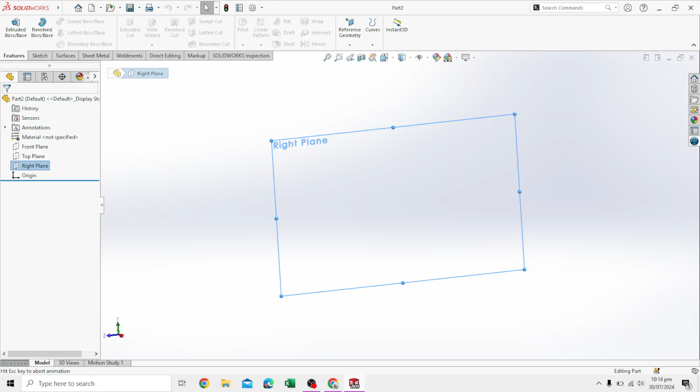Okay, next in this part, just go to the next right plane, sketch, take center lines, and we will draw out a center line from way below here and move it up through the center. Make sure it's completely straight. Then we move on to the side and also pass that through the center.

Make sure it's straight. There's a number that appears next to it that shows that it's straight, and we will make a center midpoint line, basically not a center midpoint line, and we just skip that drop down menu midpoint line, and we will draw from this center. Make sure it's vertical, and we will dimension it later.

First, we will draw another set of lines that will be completely horizontal, just like this. Same thing with the other one.

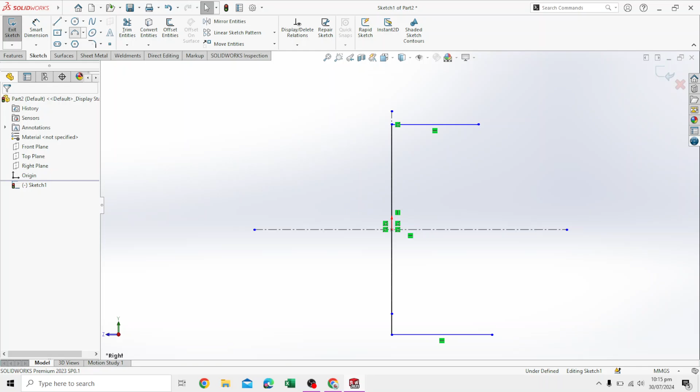Okay, and we will use the 3-point arc and connect the heads of these two, basically like that. We will specify the curvature after this.

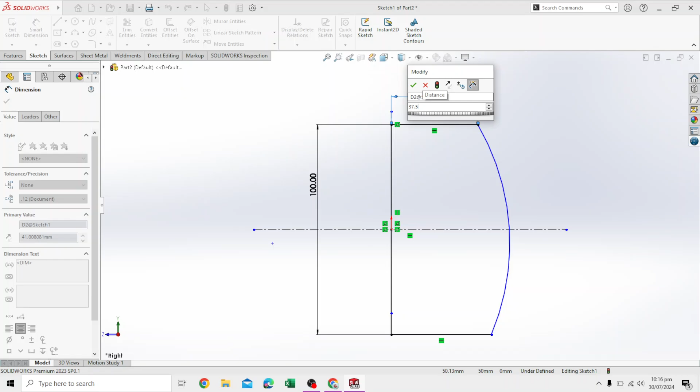So first off, we specify this, which is going to be 100. Now that is 100, we will specify this, which will be 37.5. Press enter, and the same goes for this, which will also be 37.5. Press enter, and then the curvature of this will be 125.

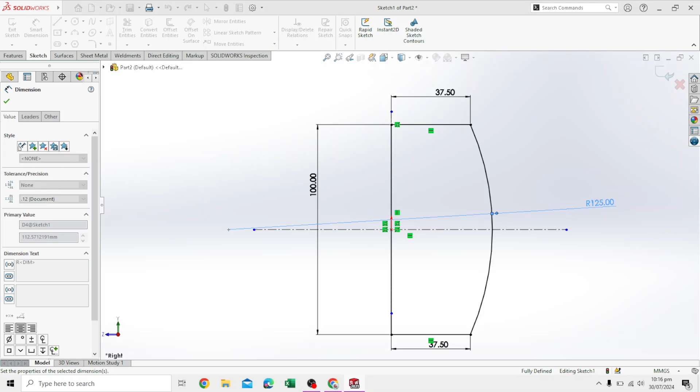Right, this is what we need. Okay, I'm going to modify this to 90.

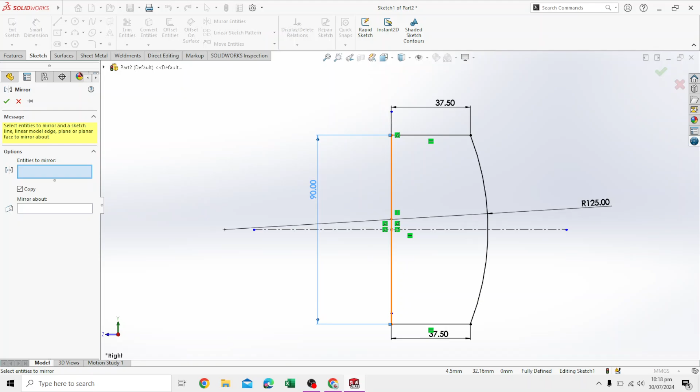Then we will go to mirror entities, and we will simply mirror this, and this, and go to mirror about, and this, basically select this. It's gonna start appearing in yellow as a preview. Say yes, this is what we need.

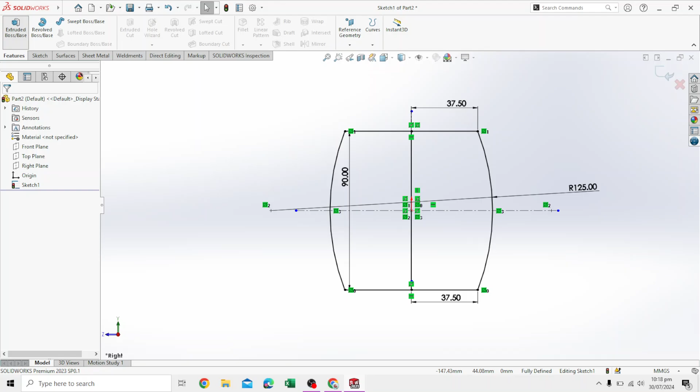After that, we go to features and extrude this by 100 millimeters. It's a blind extrude, so it's going to be in that direction. Doesn't matter which direction it's in.

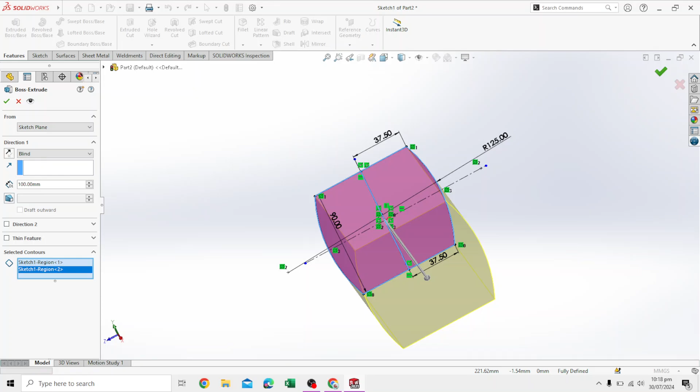It's going to extrude. Sorry, yeah, the reason that didn't extrude is because I didn't select this region, so it's like this, like this. This is what it's going to look like. We say yes. This is what we need.

Now we click on this face. We say sketch, and we say convert entities. The boundary of this shape has now been drawn. That's why you see it as a much darker color as before.

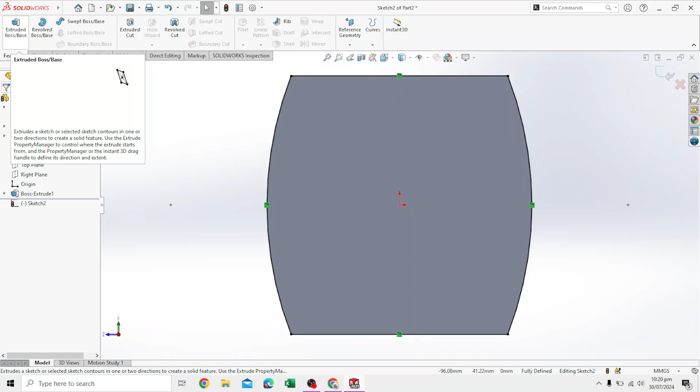Go to features, and we will extrude this once more. Not 100, will be 35, and we will give it a draft of 45 degrees. Press enter. This is what it should look like. Say enter.

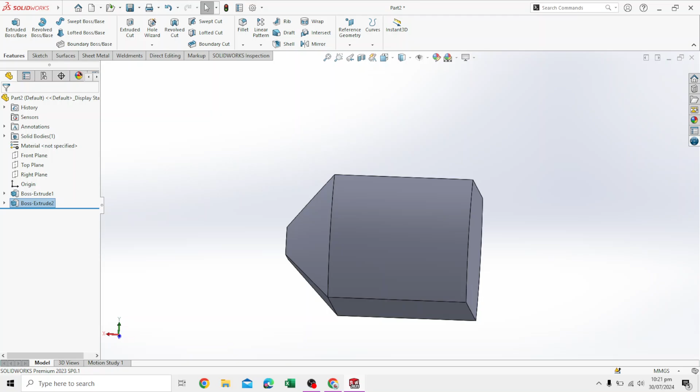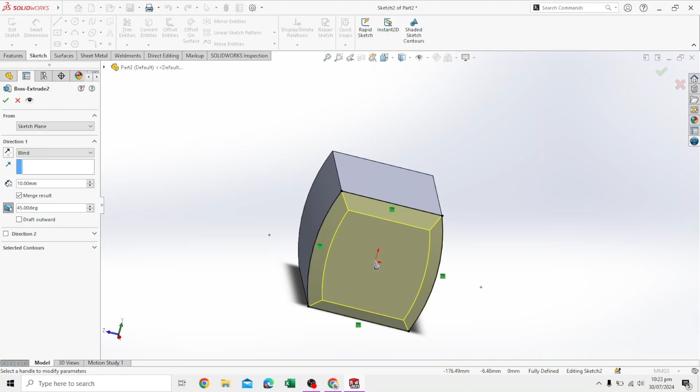On second hand, we will change this value to 10 rather than this, basically the height of the extrude, to decrease it to 10. Need more surface to work here afterwards, so decrease the extrude height to 10, and 45 degrees is correct, so we'll say that this is what it should look like.

And then afterwards we will sketch on this surface. From this we will basically draw a circle at the center. Smart dimension, give it a dimension of 68. Yes, it's almost reaching the periphery.

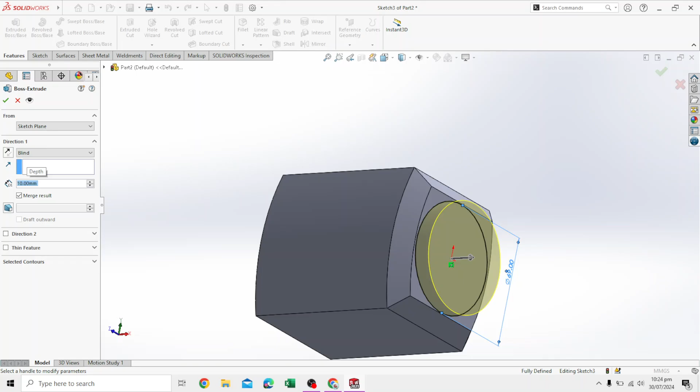And from that, we will extrude this feature by 10 millimeters. Say enter, and yes.

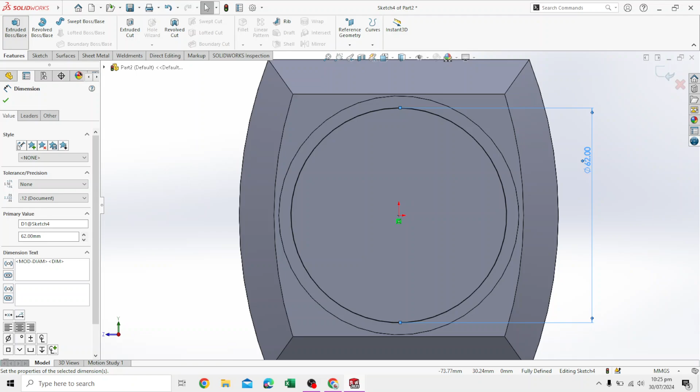Further on, we will click here, select this, another circle, which should be this, and then we will say extrude this newer circle by 30 millimeters. Say okay. This is what it should look like.

And then we will sketch on the tip of this surface that we just extruded. On this surface, we will draw a circle that is completely in line with the horizontal. We will specify the center.

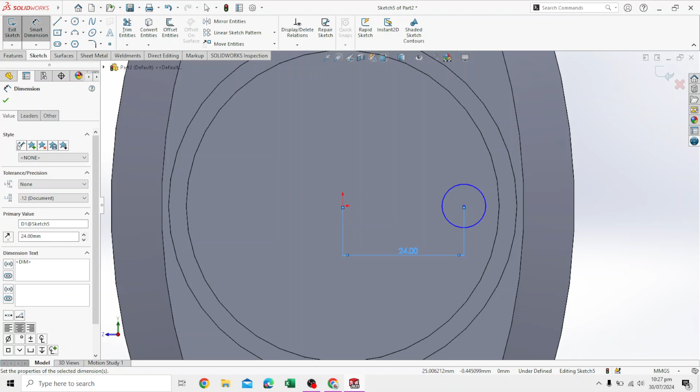Once we do that, we will make the distance from this to this about 24, I think. And the circle itself is 7.24.

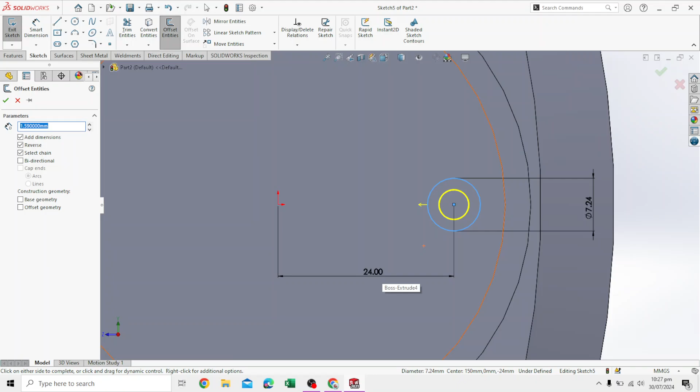And give it an offset. Give this circle an offset. Reverse the direction from this number. We will reverse the direction, and obviously 10 is too big for this, so it's not showing a preview. 1 and 1.59 is the size of the preview. There you go. Now it's appearing inside, and the distance and everything else is set. So let's say okay, this is what we need.

Change this value to 7. Actually 27 will be better. Yep. Say okay. So we change, this is 27.

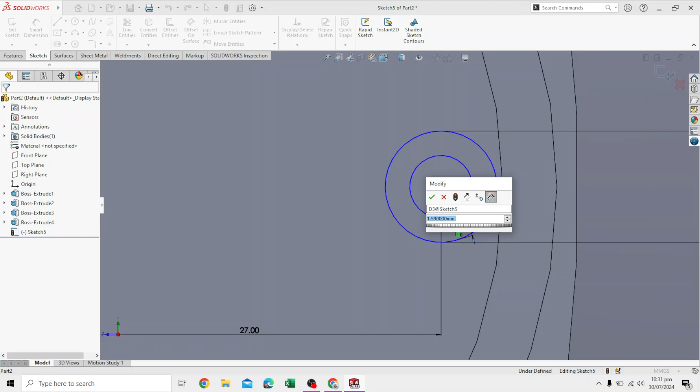This, I think we should change this as well and make it only 1 millimeter. Yep. If we zoom out, this is how it's gonna look like. Yeah, I think that's better.

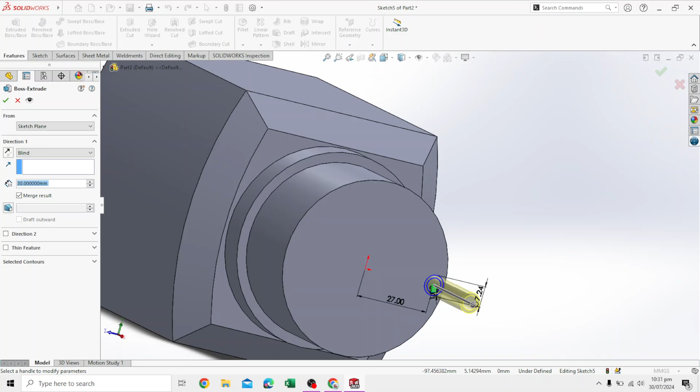In that context, now we will extrude it, and extrude it by 1 millimeter only.

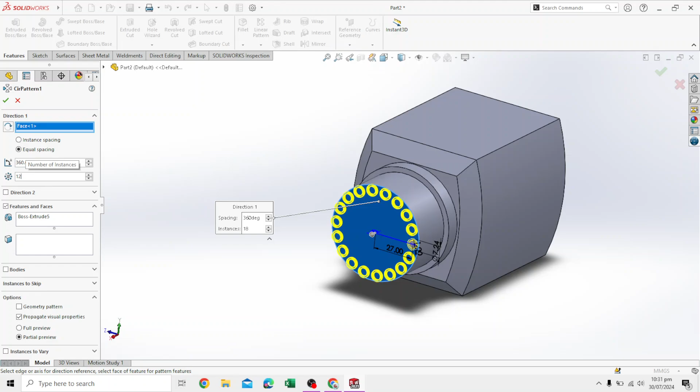In this direction, it's being extruded in the right direction, and we will then go to linear pattern, drop down menu, circular pattern. In the circular pattern, it will want a direction. You see this box that's highlighted, so you select this and change this number to 12. Say enter. Yes, this is what we want.

Okay, this is what it should look like. I think some of them are clipping a bit outside.

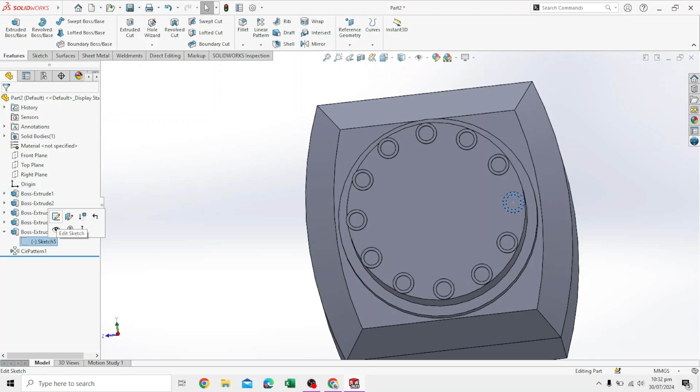If we were to go back and sort of decrease the size of this sketch, so instead of 27, it's just like 26.5.

That will pull it in a bit, and a few of those nuts were clipping outside. Now that won't happen. It's going to rebuild all those structures again, but now with the new information.

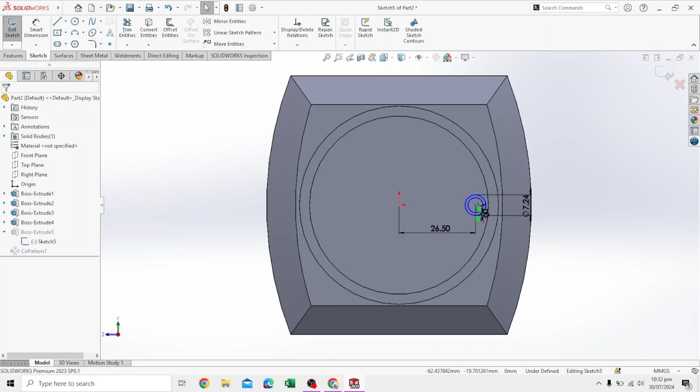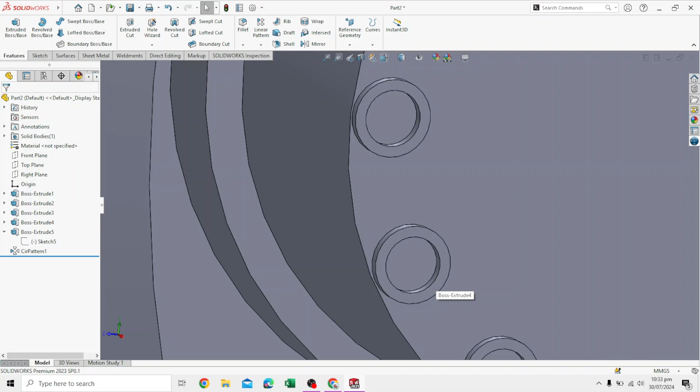Let me just exit sketch so it finalizes the structure. There you go. They're at the corner, but not clipping out as they were before. So this is much better. You can move it inside or outside, but I think this is better.

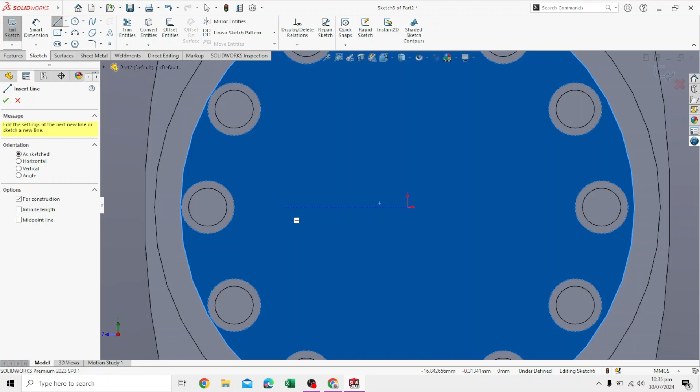On this face, go to sketch, and we will draw a center line. Don't like how it turns this blue until you click or do something. Sharp blue.

From here, we will draw a normal line at a certain distance. Let me just draw this instead of a normal line, we'll do a midpoint line. Click it here on this. Not sure why it's glitching out. It should be completely vertical, 90 degrees.

Let me specify the dimension of this, the 34 millimeter. Yep, that's about right.

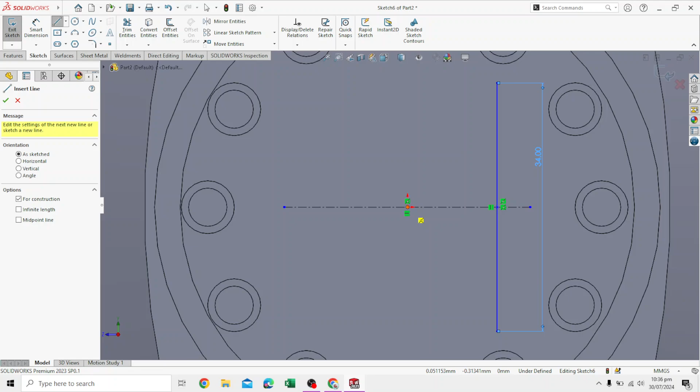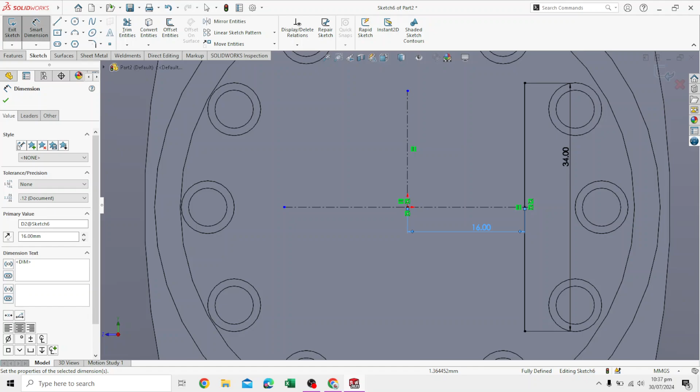Make another center line from the center and simply mirror this first line. No, before mirroring, let me cross out of that and go to another dimension, and we need to also dimension this, and this distance needs to be 16. Enter. That's how far it needs to be, and then now we will mirror the entities, which is basically just this line.

And we will mirror it about this. Now we will move on. Yes, this is what we need.

Go to 3-point arc, click this, click this, and create a curve like this. We will obviously dimension this. In the smart dimension, go to this and give it a dimension or radius of 22.

I think it's curving way too much. It's starting to collide with this.

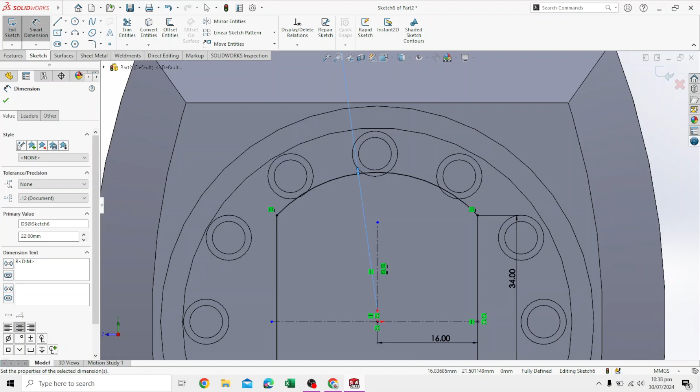I think in this case, I'm going to decrease the size of the nuts that we made. This was the circular pattern that we did for this extrude. There we go, this is the sketch for it.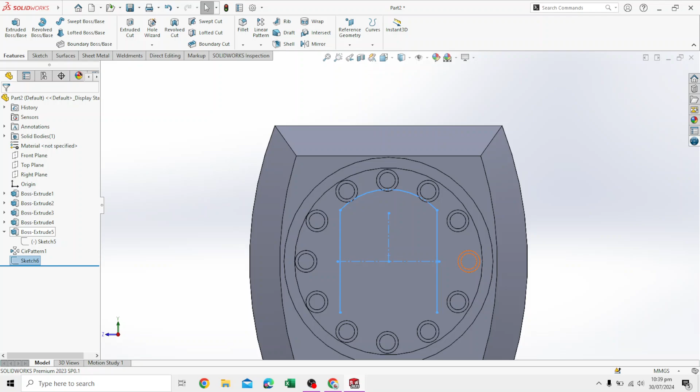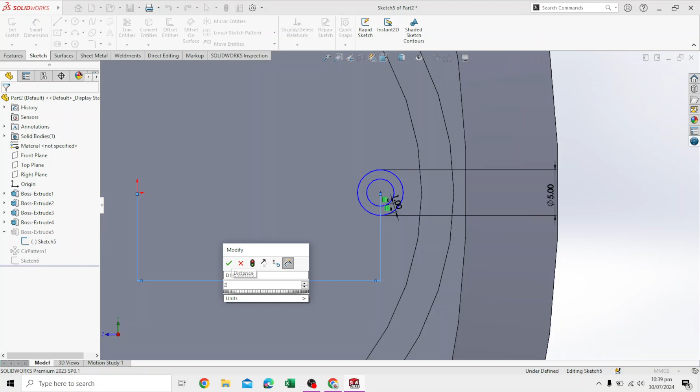I'm going to decrease the size because this is too big. It's colliding with the, I am going to make it 5. Press enter and move it outward to its original location, which was 27, so that it moves back and doesn't collide with the distance. So take note of that.

Once that's done, it will obviously apply the feature to all these. Let's move on to the sketch. Now it's not colliding anymore.

So again, if you make a mistake previously, you could just go to the tree and correct it. I did it by this, it highlights the part that I made, edit sketch, and then I went in and changed the values. Said okay, and it applied that to all these because these are made using this as the reference.

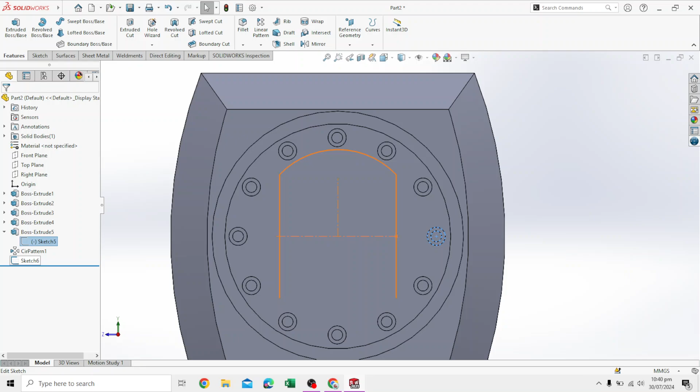We go back to this, edit sketch. In this, we go mirror entities, click this, and we say mirror about. Highlight this box, mirror about, and then for this.

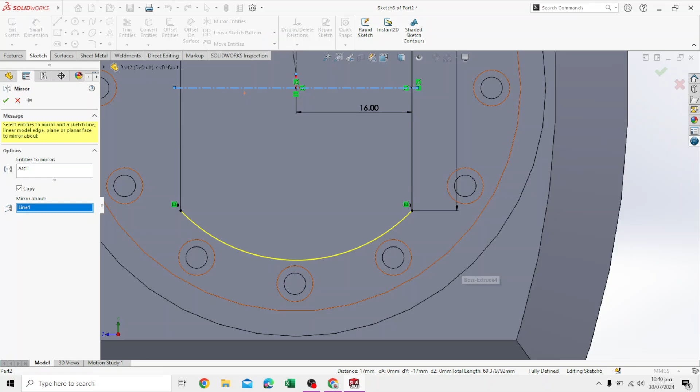And we observe that it's connected, so there's no discrepancy, there's no disconnection. It's a complete loop, it's a full surface.

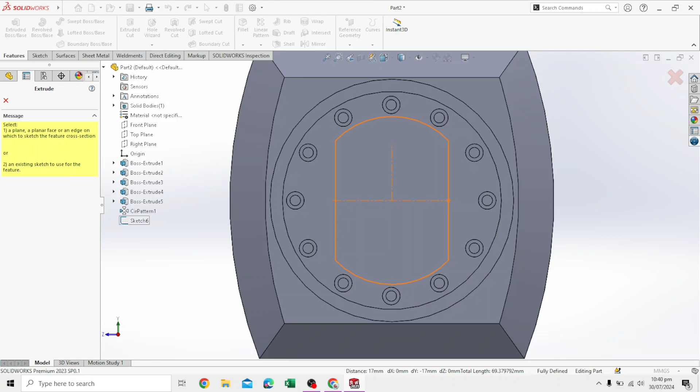Now we need to extrude it. We move out of the sketch, go to features, extrude this new geometry that we just made. Open up this loop, the sketch. This is the part we need to extrude.

It's asking obviously how much I want to extrude it. We will extrude it by 100 millimeters and say yes.

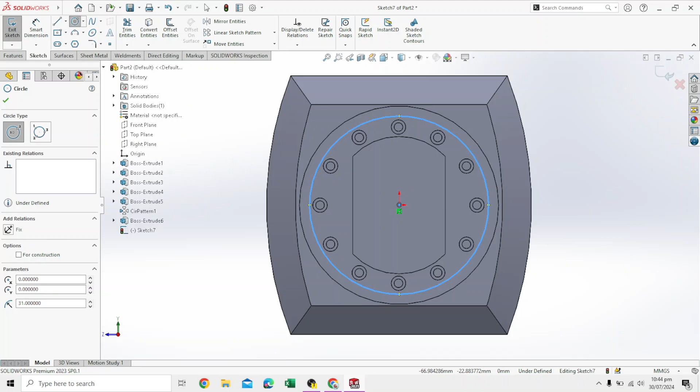In this, now we will sketch on this surface, just progressively building on top of each other. Draw a circle from the center. It should be equal to the smaller circle. Let me just check the schematics. Yes, it should be equal to this one, and then we say yes, this is what we need.

Go to features, extrude this circle now, and extrude it by 10 millimeters. After that, we will...

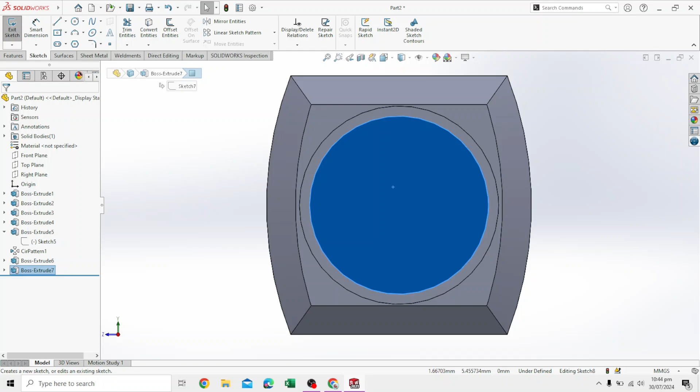Draw on the surface of this new circle, sketch, click on this corner and say convert entities. This will draw a circle, and then using that we will say offset. We will reverse the offset and give the value of 1 millimeter.

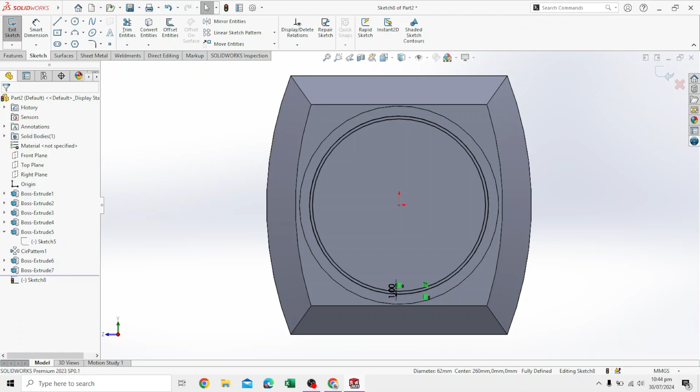Say okay, this is what we need, and now that this smaller circle that we just offset, using that we will, let me just delete the original circle and say delete. Now it's no longer there, just the offset circle is there.

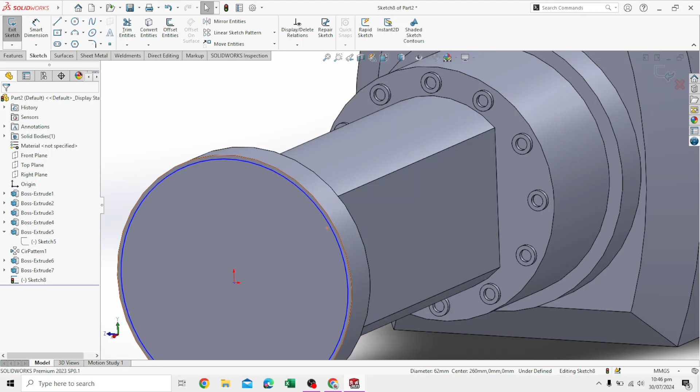We will go to features and extrude it by only 1 millimeter. This smaller circle, you can see that it's being extruded at a lesser circumference or diameter as compared to the other.

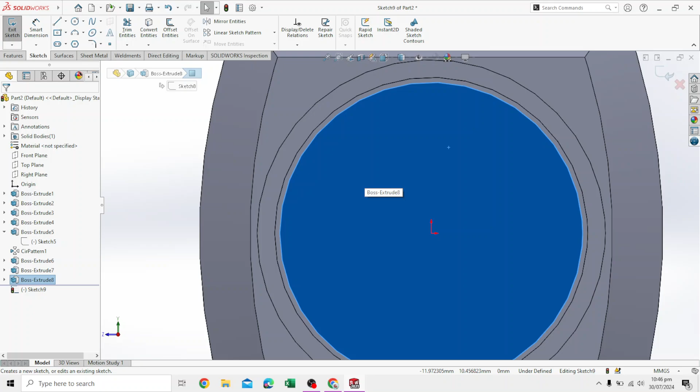Again, we will draw on this surface now and draw basically a circle. Click here, click on this circle and say convert entities, and go to extrude, and we will extrude this by 10 millimeters. Say okay, this is what I want.

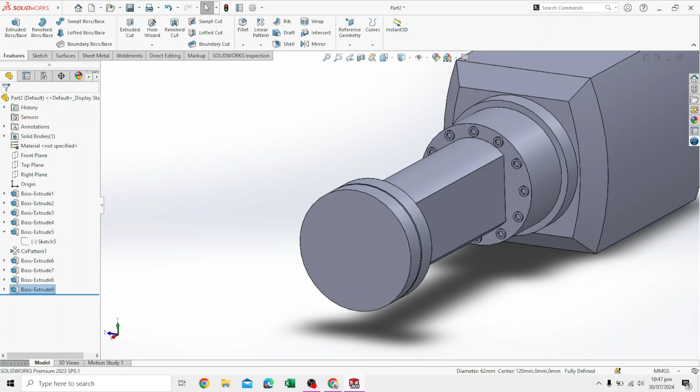So it should look something like this with a gap between it.